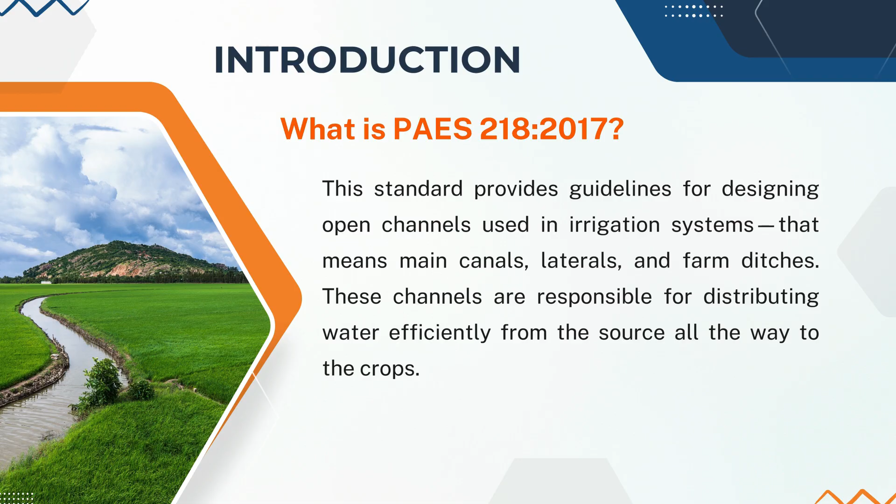The formulation of this national standard was initiated by the Agricultural Machinery Testing and Evaluation Center, or AMTEC. This was part of a project called Enhancement of Nutrient and Water Use Efficiency through Standardization of Engineering Support Systems for Precision Farming. Sounds like a mouthful, right? But in simple terms, this project aimed to create better systems to help farmers use water and nutrients more efficiently, thanks to precision farming and engineering support.

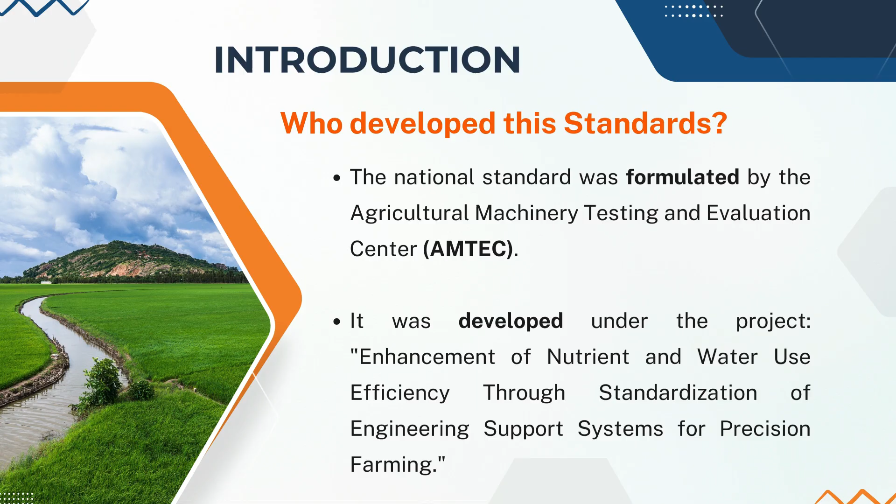The project was funded by PCAARRD-DOST, that's the Philippine Council for Agriculture, Aquatic and Natural Resources Research and Development, under the Department of Science and Technology. Now, let's talk about the legal foundation of this standard.

Under Republic Act 10601, also known as the Agricultural and Fisheries Mechanization Law or AFMech Law of 2013, the Bureau of Agriculture and Fisheries Standards, or BAFS, is mandated to develop technical standards and procedures for agricultural and fisheries machinery.

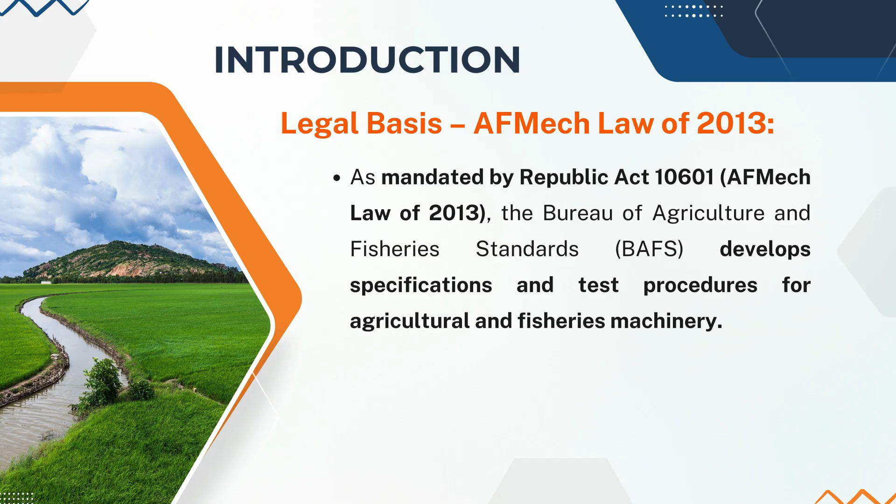So, in line with this mandate, BAFS developed and endorsed this standard, but before it became official, it was reviewed and approved by the Department of Agriculture Secretary, through the Bureau of Agricultural and Fisheries Engineering or BAFE, and submitted to the Bureau of Philippine Standards or BPS, for final numbering and official inclusion in the Philippine National Standard, or PNS, repository.

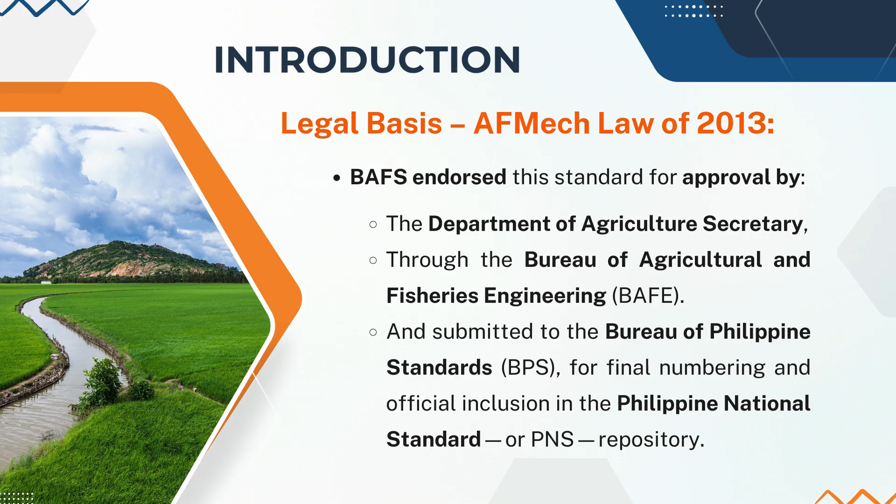And just so you know, it's not just any kind of document. PAES 218:2017 was technically prepared based on the BPS Directives Part 3:2003, which are rules for how international standards should be structured and drafted. That means it's been carefully written to align with global standardization practices.

Now here's a little tip on terminology when reading the standard. When the word 'shall' is used, it means the requirement is mandatory—you must follow it. When the word 'should' is used, it's a recommendation, something advised or preferred, but not absolutely required.

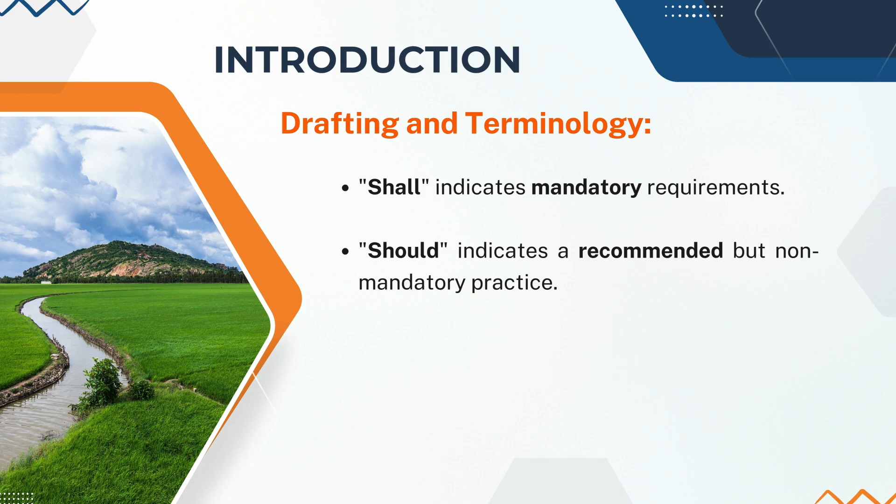So, there you have it. Understanding the background of PAES 218:2017 helps us appreciate how much effort goes into creating national standards, and how they support the goals of mechanized, efficient, and sustainable agriculture in the Philippines.

Scope. This standard provides minimum requirements and criteria for hydraulic evaluation and stable design of open channels specifically for main canals, laterals, sublaterals, and farm ditches, assuming uniform and steady flow.

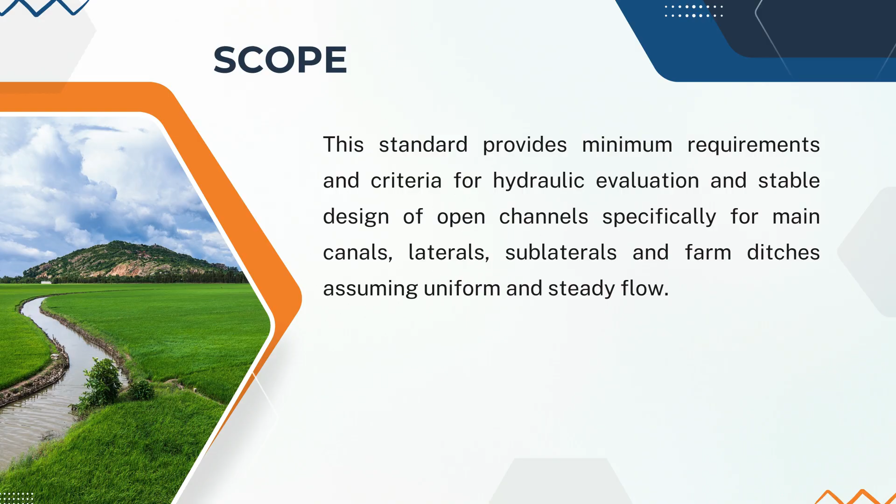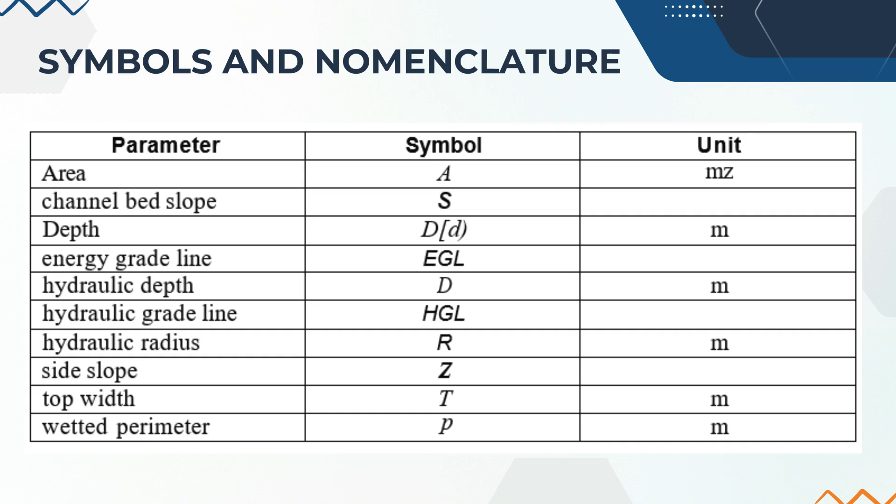Symbols and nomenclature. Here are some symbols that you might encounter while learning this subject. Take note of these as they are important in knowing the definition, discussing equations, and solving some problems. Feel free to pause if you want to jot down those terms.

Definition of terms. Before we go deeper into designing open channels, it's important that we understand the key terms used in PAES 218:2017. These definitions form the foundation of everything we'll apply in hydraulic analysis and channel design. Let's go through them one by one, along with some practical examples and their real-life applications.

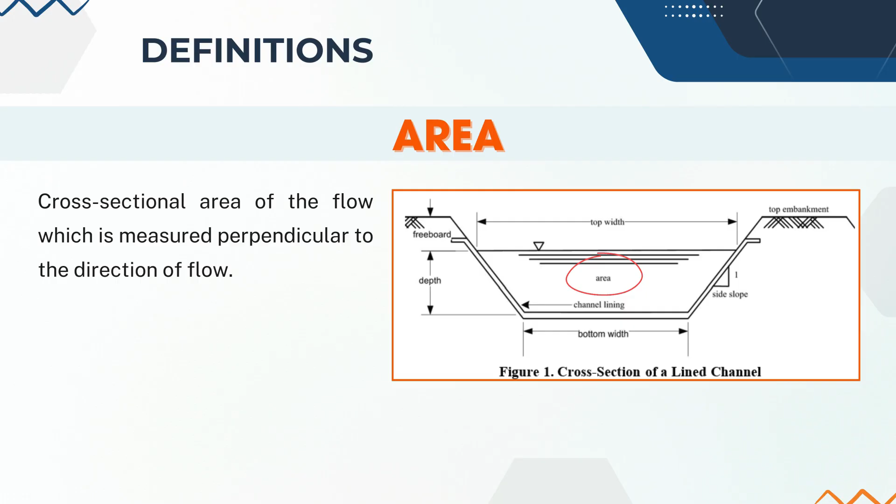First is area, which refers to the cross-sectional area of the flow. It is measured perpendicular to the direction of the water movement. For example, if you slice through a trapezoidal irrigation canal and look at the shape of the flowing water from the side, that visible surface is the flow area. This measurement is essential because it helps determine the flow rate of water moving through the channel.

Next is the channel bed slope, which describes how much the bottom of the channel inclines or drops over a certain distance. If a farm ditch lowers by 1 meter over a span of 100 meters, its slope is 1%.

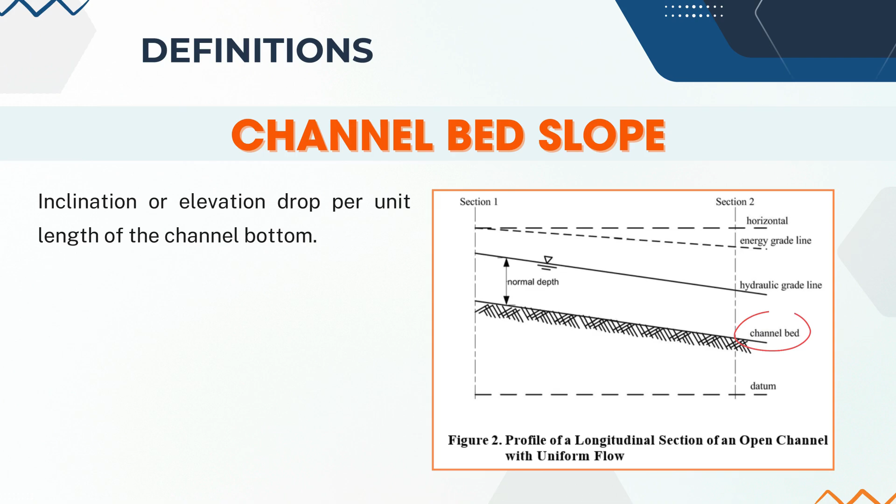This slope influences the speed of the water. Steeper slopes allow water to move faster, which is critical in designing efficient irrigation systems.

Depth is the vertical distance from the water surface to the channel bed. For instance, if water in a canal reaches 1.5 meters from the bottom, that's the depth. Knowing this helps engineers make sure the channel can hold enough water without overflowing or underperforming.

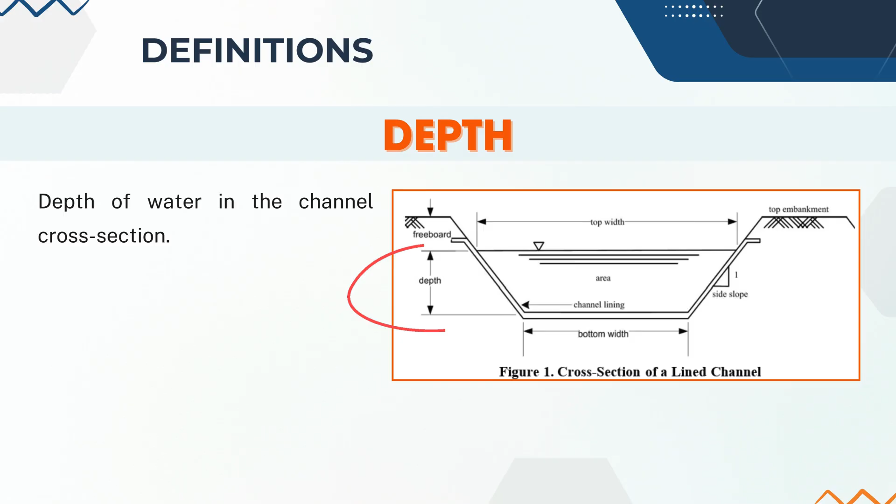The energy grade line, also known as the specific energy line, includes both the elevation of the water surface and the velocity head. In real-world applications, this line represents the total energy of flowing water. For example, in high-velocity canals, the energy line may be above the actual water surface due to the speed of the flow. This is useful for evaluating how water behaves under different energy levels.

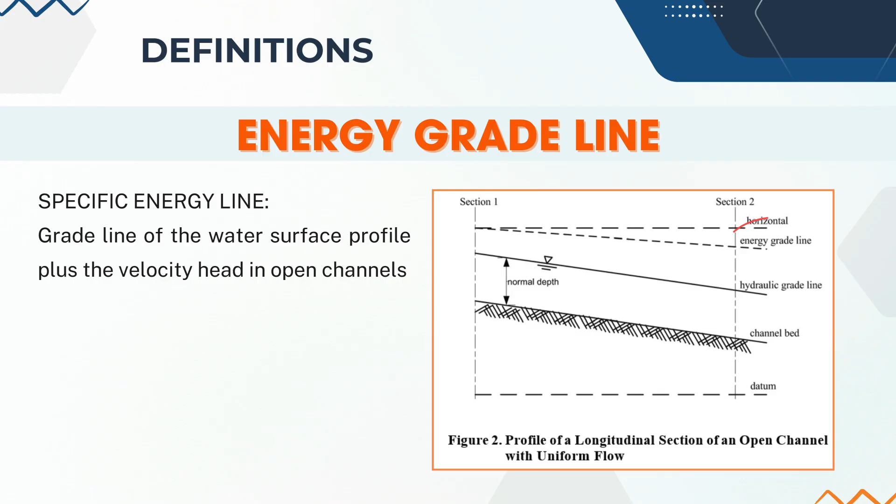Freeboard refers to the vertical space between the water surface and the top of the channel. If a canal has 0.5 meters of extra height above the water level, that's its freeboard. This added space serves as a buffer to prevent overflow during sudden increases in flow due to rain or irrigation changes.

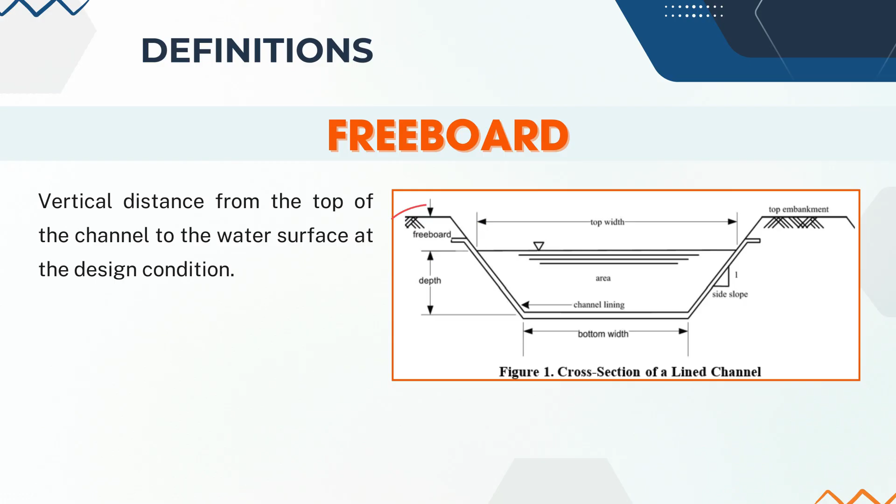The hydraulic depth is calculated by dividing the flow area by the top width of the water surface. If a flow has an area of 2 square meters and a top width of 1 meter, then the hydraulic depth is 2 meters. This value is especially important when analyzing flow types using parameters like the Froude number.

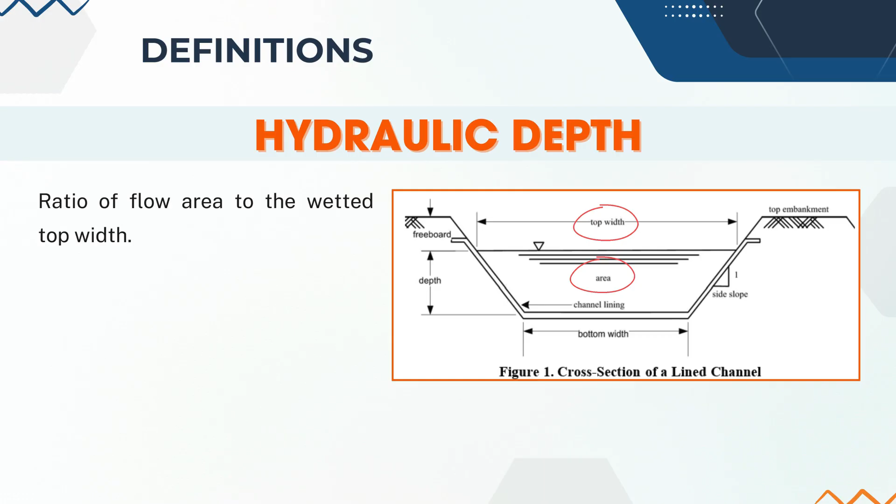The hydraulic grade line, or hydraulic gradient, traces the free water surface. In uniform flow, this line stays level with the water. Understanding this helps in evaluating the pressure and energy distribution along the canal.

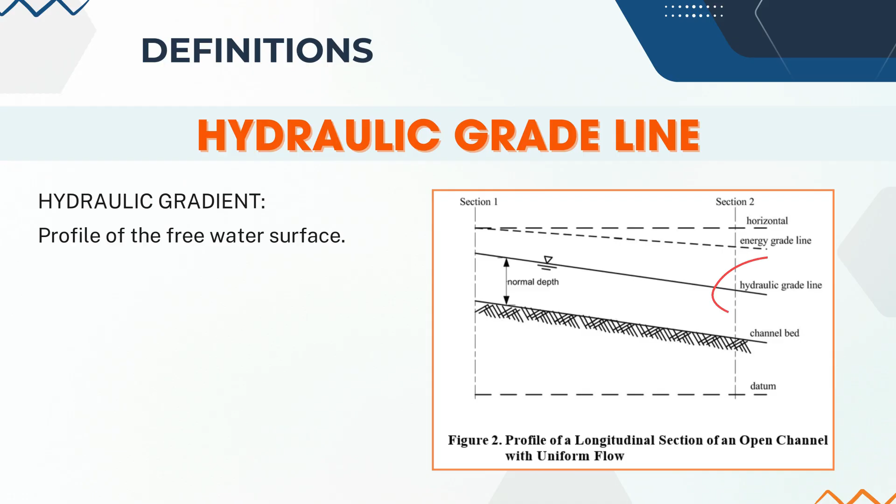Next is hydraulic radius, which is the cross-sectional area of flow divided by the wetted perimeter, the part of the channel wall that comes into contact with water. This value plays a big role in estimating flow velocity using equations like Manning's formula.

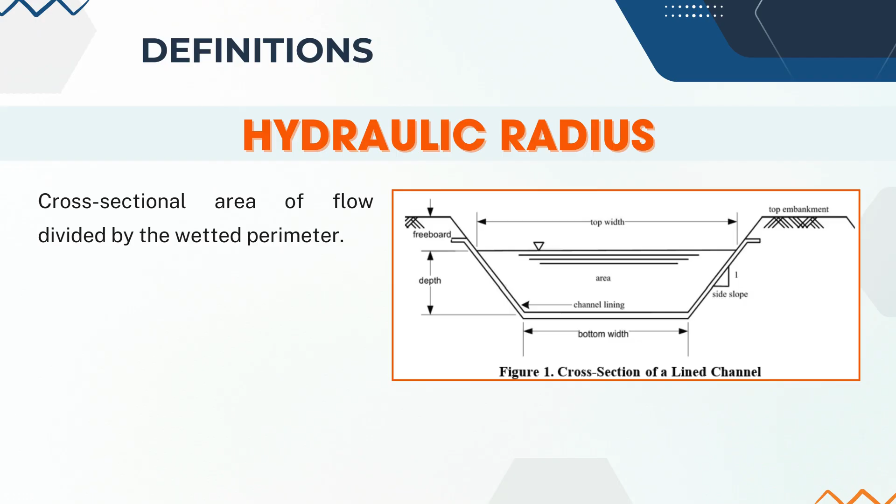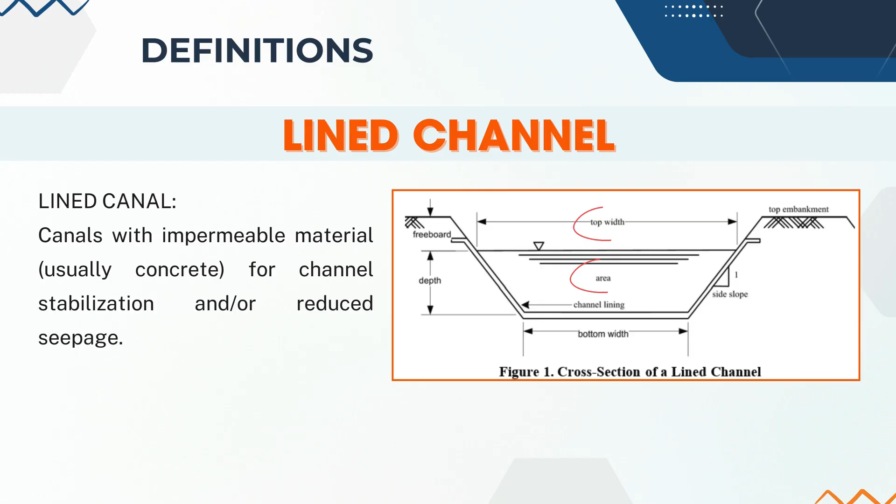A lined channel is one where the walls and bottom are made of impermeable materials such as concrete. These are common in many irrigation systems because they reduce seepage and prevent erosion. For example, many rice irrigation canals in the Philippines are concrete-lined for better water control and durability.

Normal depth refers to the constant depth of flow in a channel under uniform flow conditions. It's the ideal, steady water level that engineers use as a reference for design and analysis.

Open channel flow simply means water flow where the top surface is exposed to the atmosphere. Examples include canals, ditches, streams, and even culverts or partially filled pipes. This is the most common type of flow in agricultural water systems.

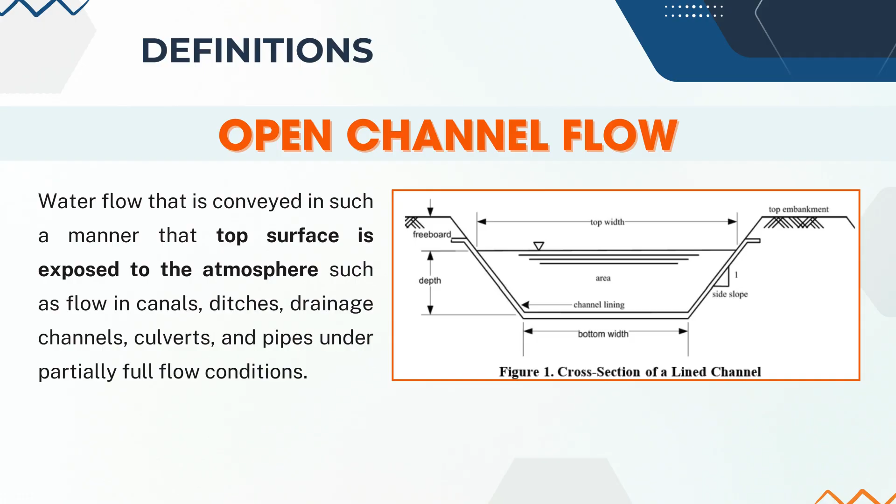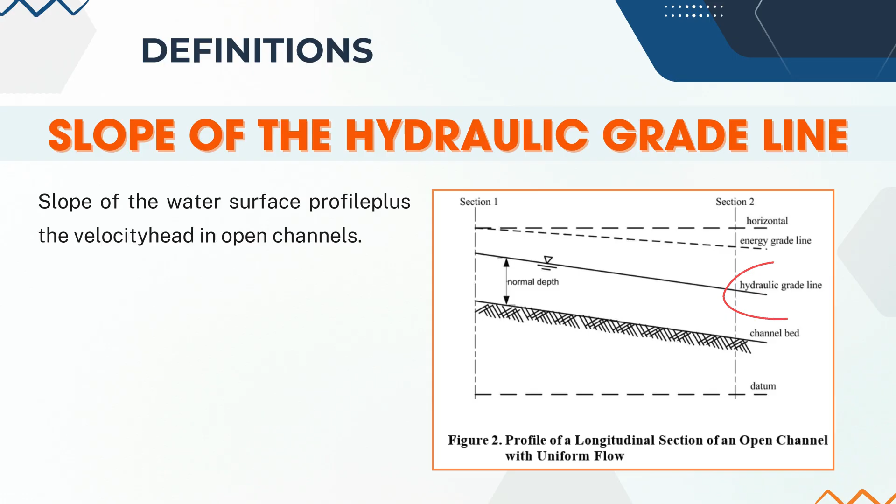The slope of the hydraulic grade line shows how much the water surface drops along the length of the channel. Similarly, the slope of the energy grade line includes both the slope of the water surface and the energy from flow velocity. These slopes are essential in understanding how energy and water levels change along the channel, especially in non-uniform conditions.

Side slope is the ratio between the horizontal and vertical dimensions of the channel wall. For example, a side slope of 2:1 means that for every meter the wall goes up, it stretches 2 meters horizontally. This ratio helps keep the channel stable and prevents collapse, especially in soil-based structures.

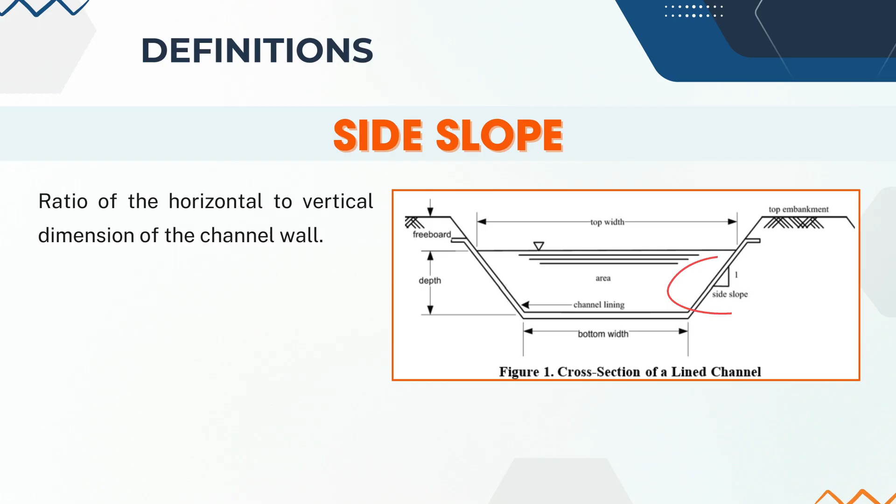The top width refers to how wide the water surface is across the channel. For instance, if the water stretches 3 meters from one side to the other at the top, that's the top width. It's an important part of flow and capacity calculations.

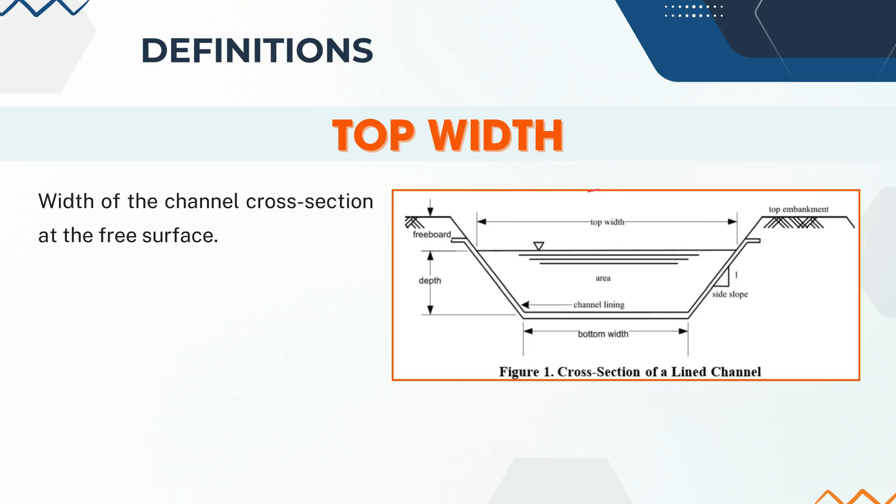Uniform flow happens when the depth, area, discharge, and velocity all stay consistent along a portion of the channel. This is the flow condition assumed in most design scenarios because it simplifies analysis and makes performance more predictable.

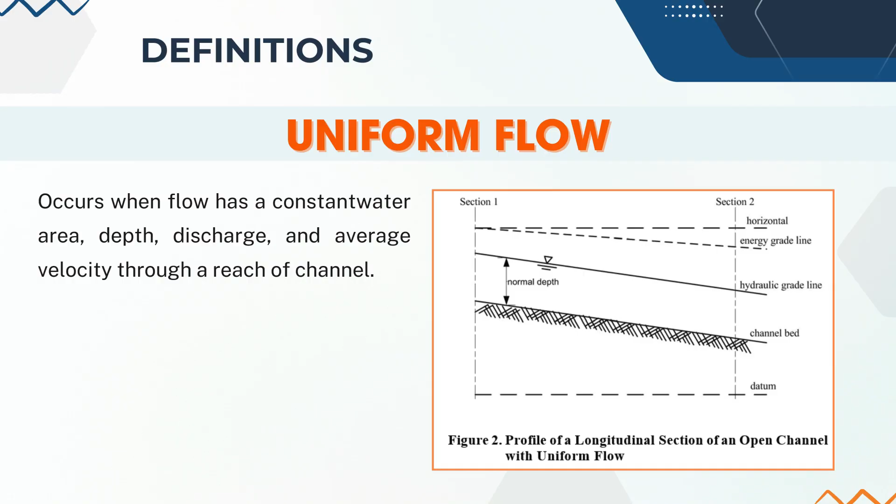An unlined channel is one that is simply dug through the soil, without concrete or any lining. These are more affordable but prone to seepage and erosion. A common example is a basic farm ditch formed by excavation, where the same soil is used to build the embankments.

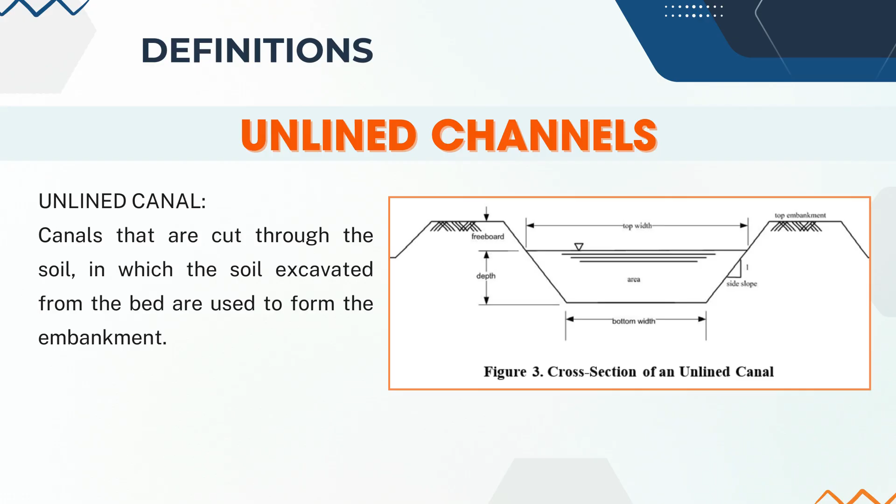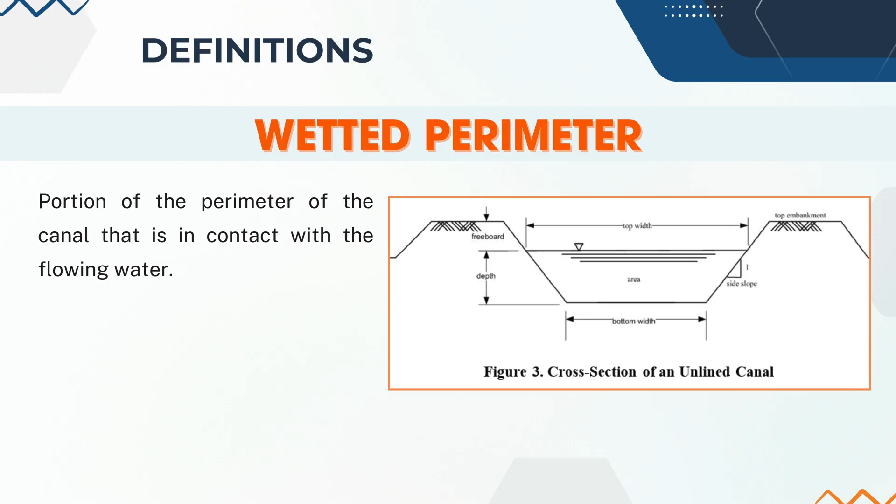And that wraps up the key definitions used in PAES 218:2017. Understanding these terms will make it much easier to follow along in the next parts of the standard where we apply them in actual design.

In designing open channels for irrigation systems, whether it's for main canals, laterals, sublaterals, or farm ditches, there are 6 key parameters that need to be determined. These parameters guide us in creating a stable, efficient, and functional channel design.

First is design discharge or flow capacity. This refers to the amount of water the channel is intended to carry under design conditions. It's the basis for sizing the entire system.

Next is flow velocity. This is the speed at which water travels through the channel. It must be controlled to prevent problems like erosion or sediment buildup.

The roughness coefficient represents the resistance to flow caused by the channel's surface. It is essential in computing velocity and discharge using hydraulic formulas.

Canal cross-section refers to the shape and dimensions of the channel. The chosen cross-section affects how much water can be conveyed and how stable the channel will be.

Bottom slope is the longitudinal slope of the channel bed. It ensures that water flows steadily and uniformly along the length of the channel.

Lastly, freeboard is the vertical space between the water surface at design flow and the top edge of the channel. This acts as a safety margin to prevent overflow.

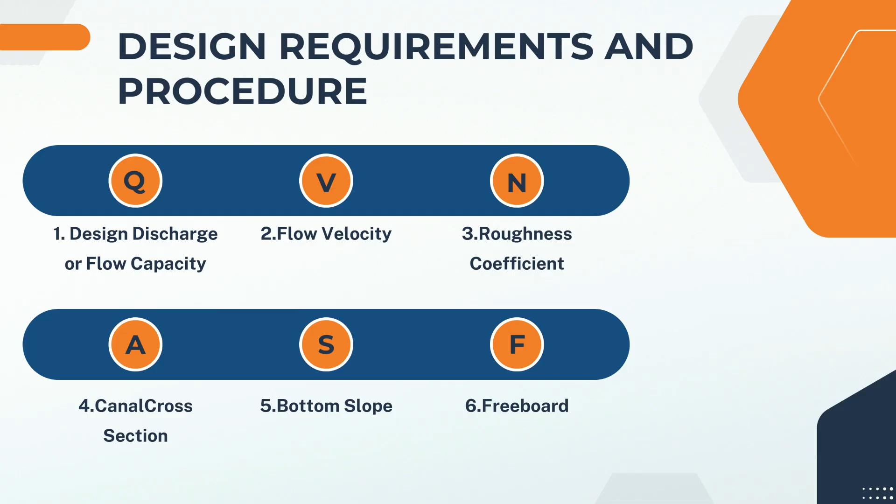All of these design parameters must be considered together to ensure an effective and reliable open channel system. In the following parts, we'll learn how to apply them in actual design computations. For further information, let us discuss one by one based on PAES 218:2017.

Design discharge: the design discharge for the main canal shall be equal to the diversion water requirement. Determination of diversion water requirement is shown in PNS/BAFS/PAES 217:2017, Determination of irrigation water requirements.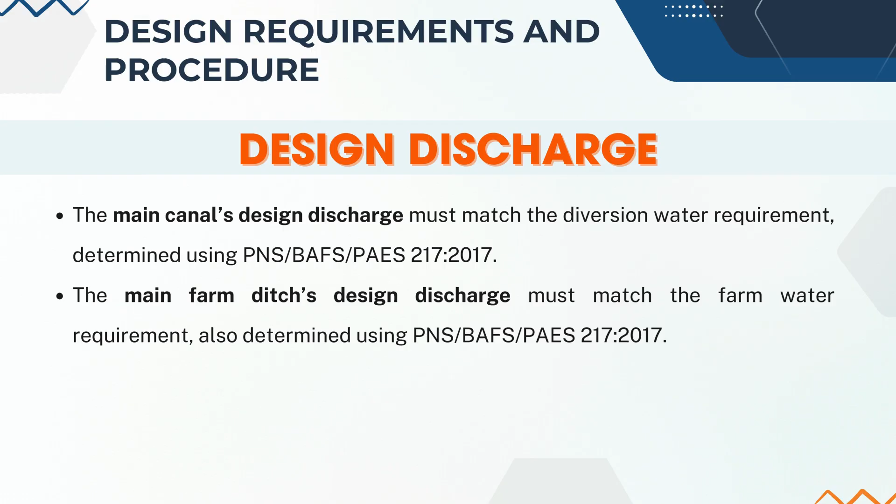The design discharge for the main farm ditch shall be equal to the farm water requirement. Determination of farm water requirement is shown in PNS/BAFS/PAES 217:2017, Determination of irrigation water requirements.

Flow velocity, section 5.2.1: for unlined channels, the design flow velocity of the canal shall not exceed the maximum permissible velocity, in order to avoid destructive erosion to the channel and progressively destroy fertile lands. The maximum permissible velocity depends on the resistance to erosion of the banks of the canal. The values for different materials are given in Table 1.

For lined channels, the minimum permissible velocity shall be considered. However, the flow velocity shall be in no case too low to produce sand deposits or allow weed growth inside the canal. The permissible minimum velocity can be estimated as 0.6 meters per second for plain water and 0.9 meters per second for water with sediments.

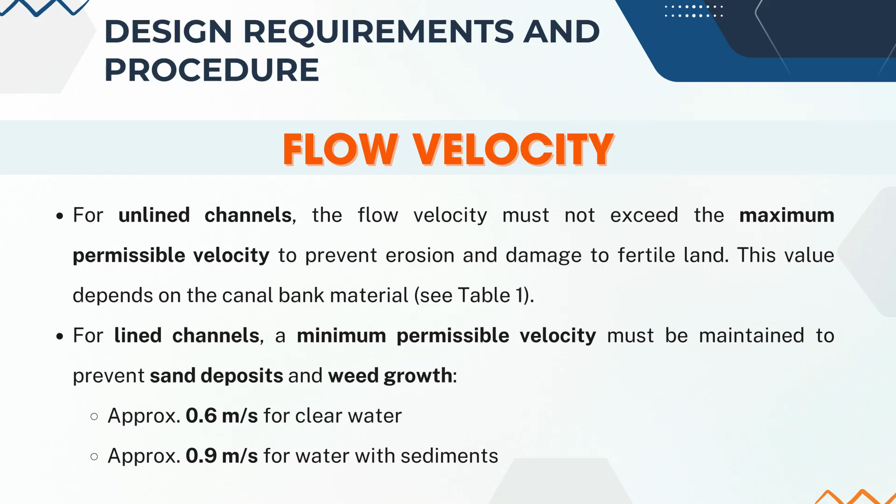Table 1 shows the maximum velocities for different types of materials. It includes the type of material and its maximum permissible velocity in meters per second. Source: Irrigation Engineering Manual for Diversified Cropping, 1991.

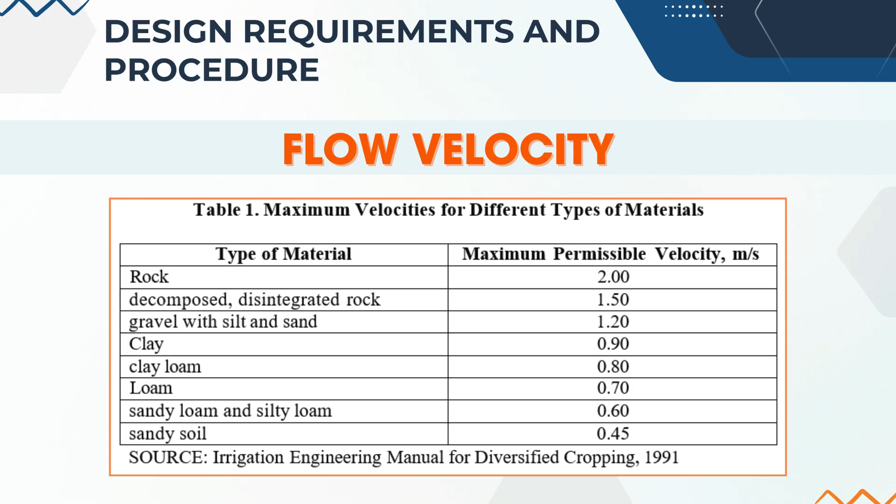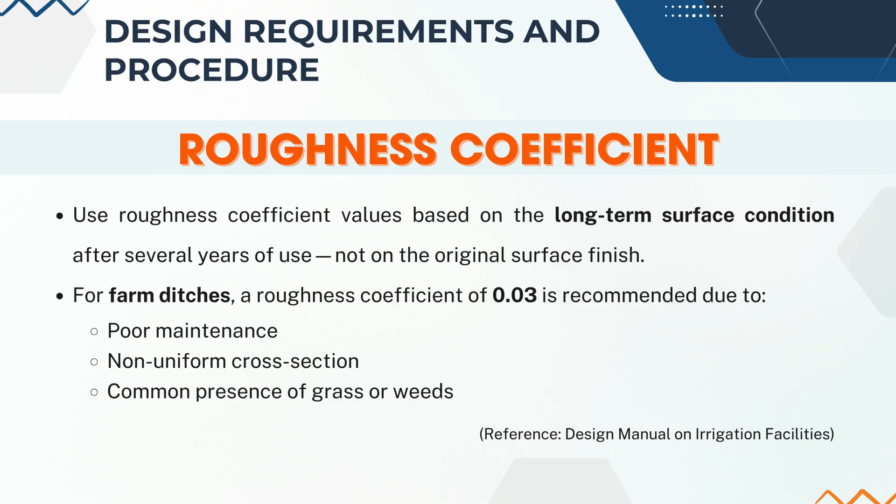Next, roughness coefficient. Use roughness coefficient values based on the long-term surface condition after several years of use, not on the original surface finish. For farm ditches, a roughness coefficient of 0.03 is recommended due to poor maintenance, non-uniform cross-section, and common presence of grass or weeds. Table 2 provides roughness coefficient values for various channel materials.

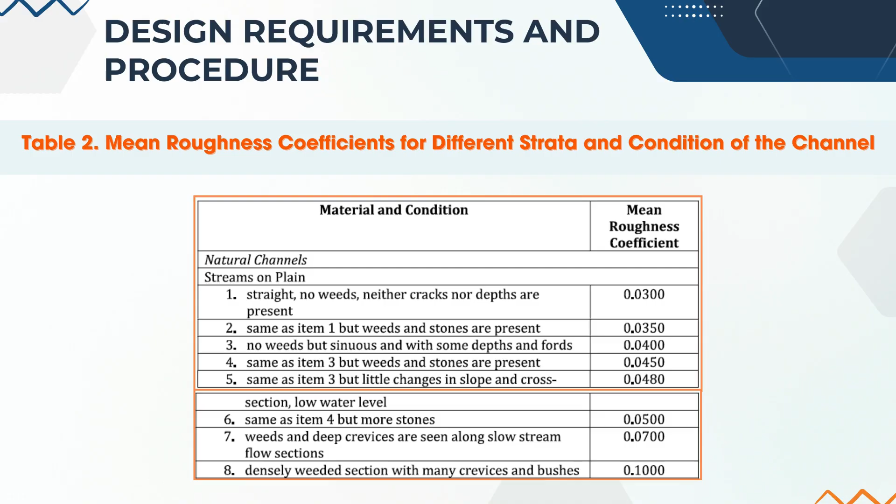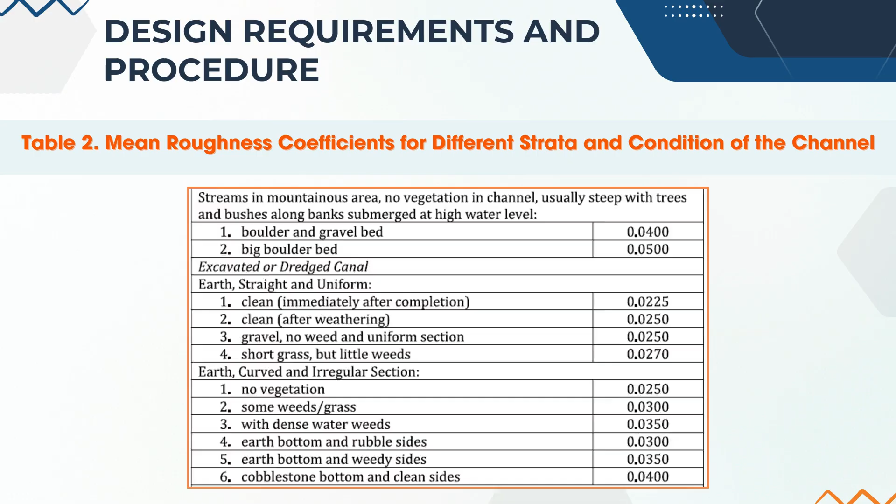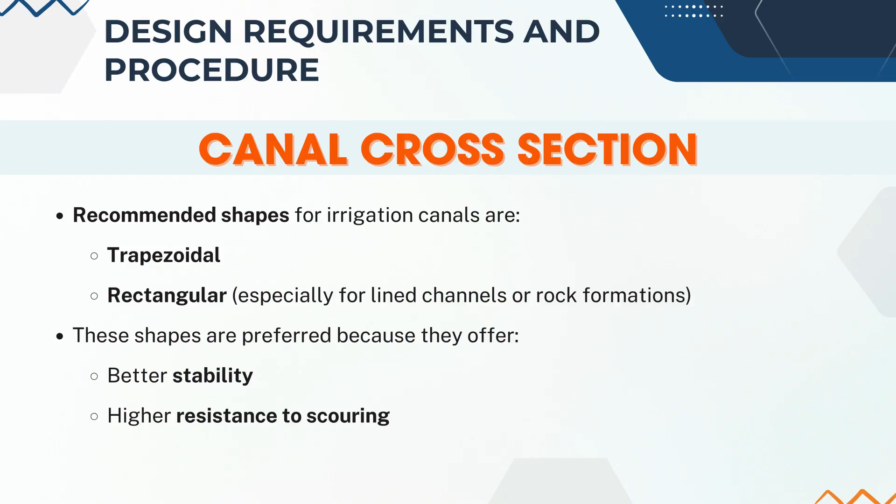Canal cross-section: the recommended shapes for irrigation canals are trapezoidal or rectangular, for lined channels or rock formation, due to their stability and higher resistance to scouring. Thus, the guidelines in this standard are limited to such shapes. Sample cross-section is shown in Figure 3. Cross-sections of other canal shapes are shown in Annex A.

Side slope. For lined channels, the recommended side slope is 1.5:1. For unlined channels, side slopes shall depend on soil characteristics and should be flat enough to avoid the possibility of caving in after saturation. Steeper slopes can be permitted in cutting reaches in rock or hard strata but not for embankment reaches. Recommended values are shown in Table 3.

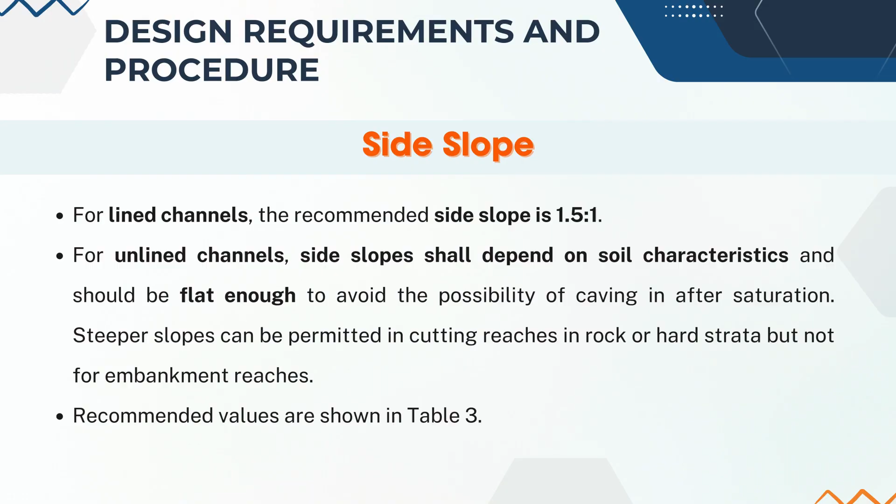Channel bed width and depth ratio, B/D ratio. For lined and unlined channels, several B/D ratios can be selected in order to satisfy a given design discharge. The bed width and channel depth can be computed by trial and error using Annex B.3, or determined using Table 4, which shows the recommended B/D ratio for a corresponding design discharge.

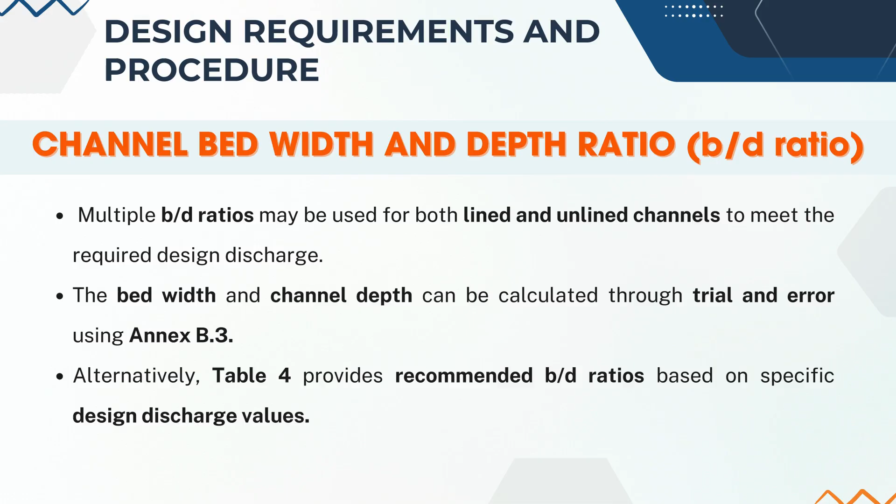Bottom slope. The bottom slope, or the slope of the channel bed, shall be determined from the topographic surveys.

Freeboard. The flow capacity in the cross-sectional area, including the freeboard, shall be about 1.25 to 1.35 times the design discharge. For unlined and lined channels, the freeboard shall be calculated based on Annex B.4. The largest value shall be selected for the freeboard.

A sample computation is shown in Annex C.

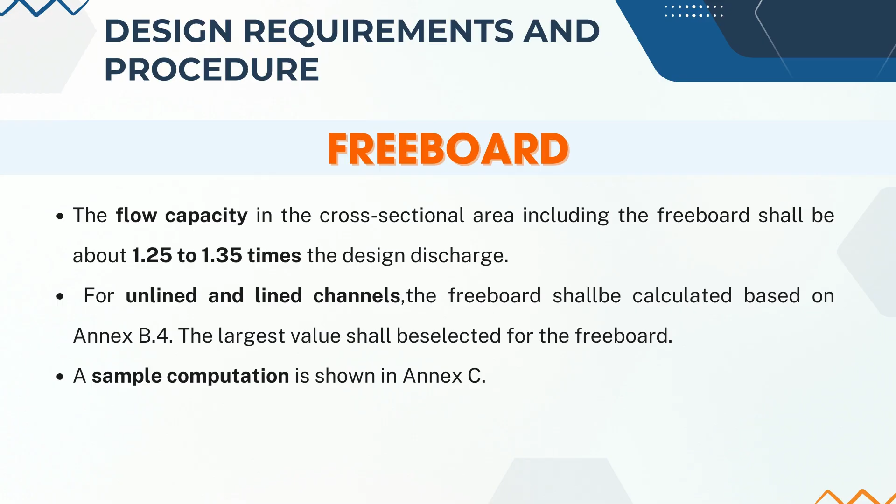Lastly, canal route selection. The canal route must ensure that design discharge and design depth are maintained. The supply canal should follow the highest points of the land to allow gravity irrigation over the widest possible area. Use appropriate conveyance structures, for example, flumes and siphons.

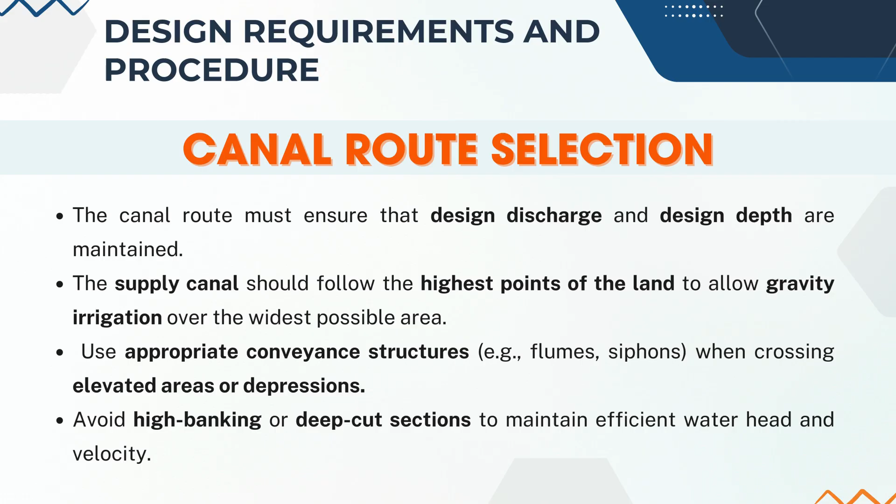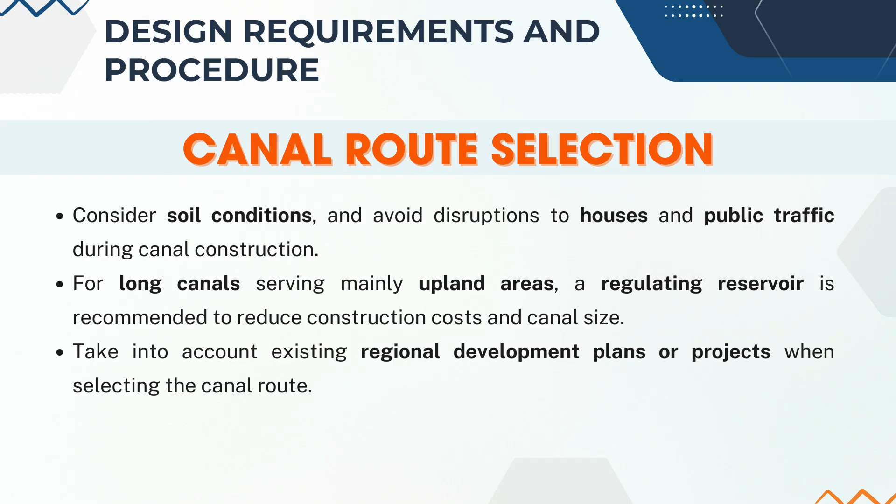When crossing elevated areas or depressions, avoid high banking or deep-cut sections to maintain efficient water head and velocity. Consider soil conditions, and avoid disruptions to houses and public traffic during canal construction. For long canals serving mainly upland areas, a regulating reservoir is recommended to reduce construction costs and canal size. And take into account existing regional development plans or projects when selecting the canal route.

Now that we have learned about the design requirements and procedure, it's time to understand how these parameters come together in the actual design process. Each parameter plays a role in determining the size, shape, and performance of the channel.

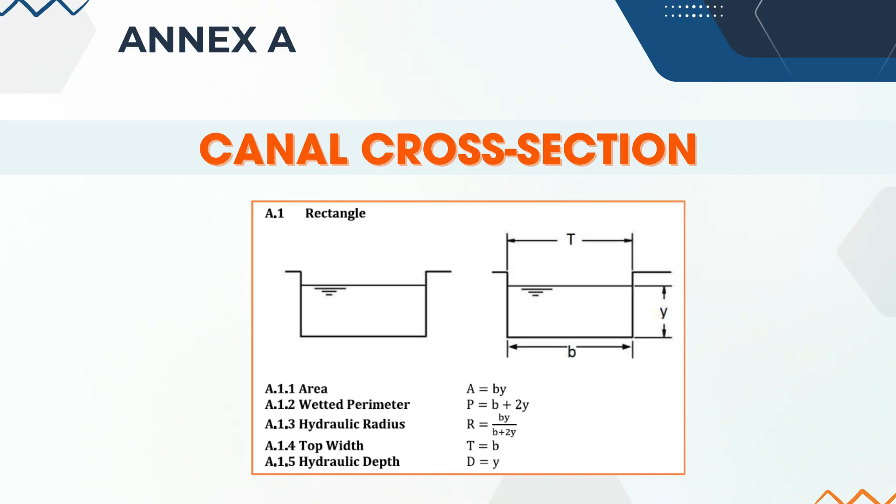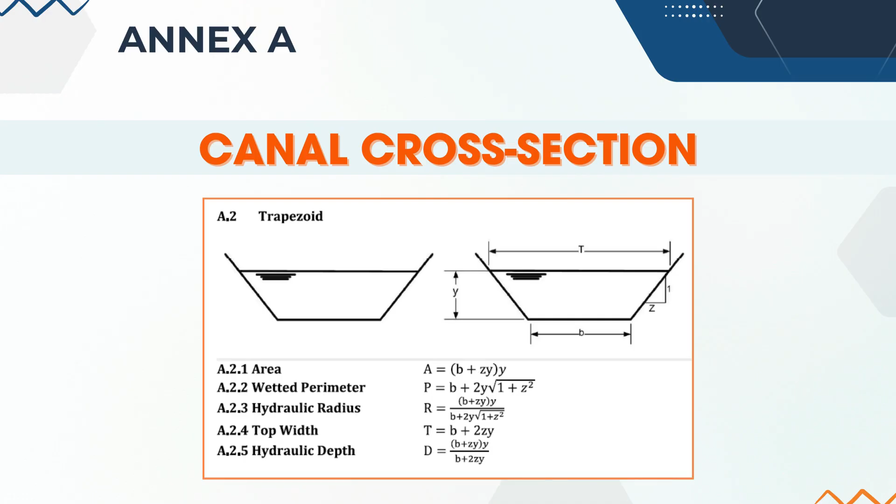Annex A. This section provides the different cross-sections used in canal design and their corresponding formulas. Each cross-sectional shape has its own set of equations for calculating area, wetted perimeter, hydraulic radius, top width, and hydraulic depth. These are essential for determining the flow capacity and stability of the canal. Understanding these shapes helps engineers choose the most appropriate design based on site conditions, available materials, and desired performance.

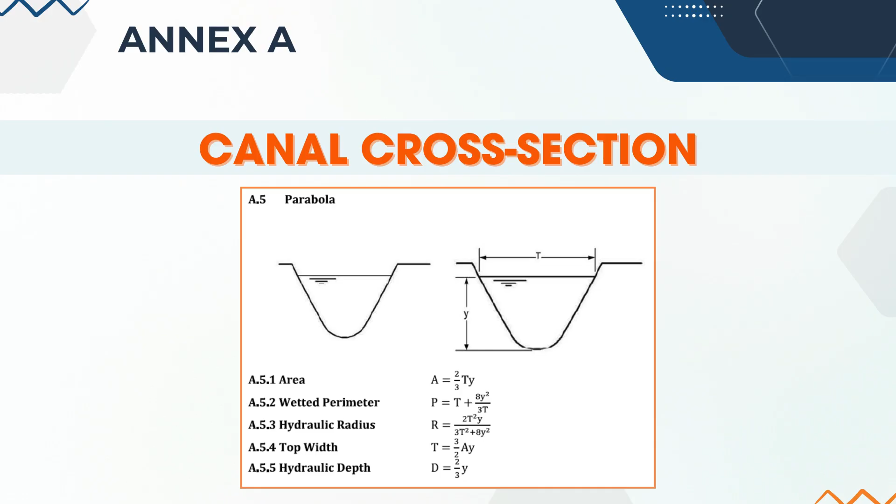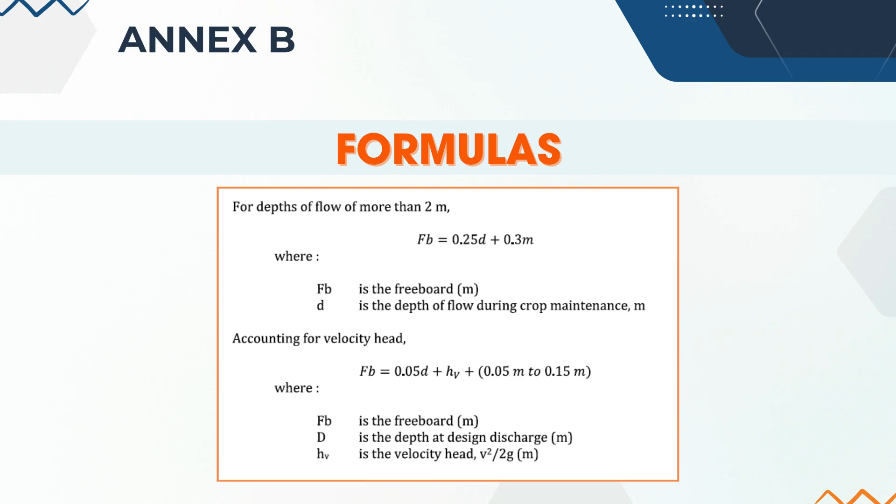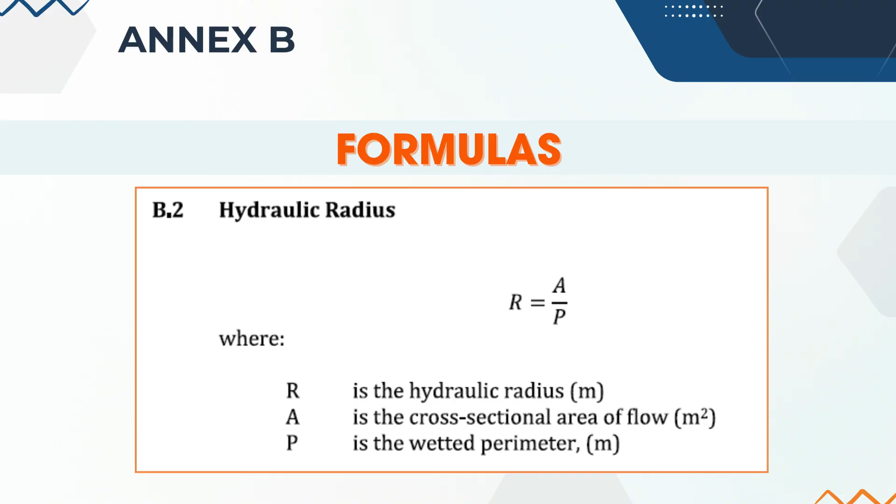The hydraulic depth is calculated by dividing the flow area by the top width of the water surface. It tells us how deep the flow is, on average, across the channel width. The hydraulic radius is the ratio of the flow area to the wetted perimeter. It's a key factor in determining flow velocity and efficiency using Manning's equation.

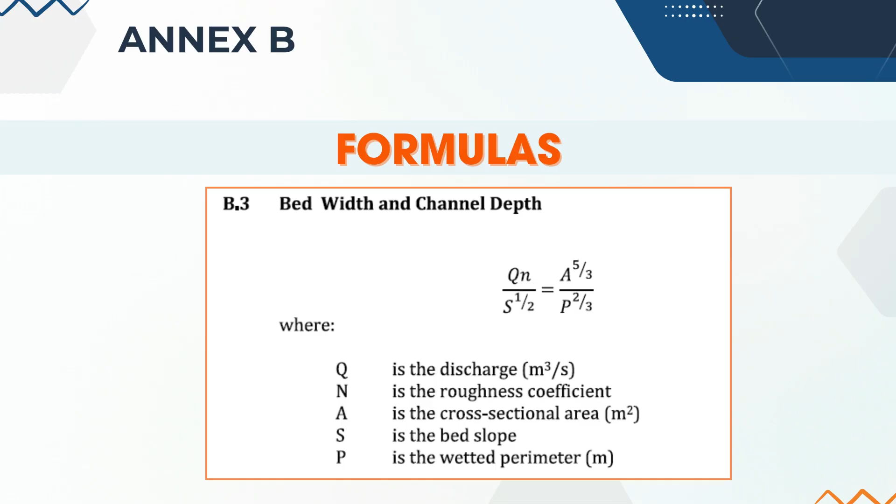We also use formulas to solve for the bed width and channel depth based on the desired discharge and side slope. These dimensions define the physical shape of the canal. Lastly, freeboard is determined as an additional vertical distance above the design water level. This ensures safety by preventing overflow during sudden changes in flow or water level.

These general formulas are foundational to any open channel design, and mastering them is essential for accurate and effective engineering work.

And that wraps up our discussion on the key design concepts and formulas for open channels based on PAES 218:2017. Understanding these fundamentals is essential for designing efficient and reliable irrigation systems that support agricultural productivity.